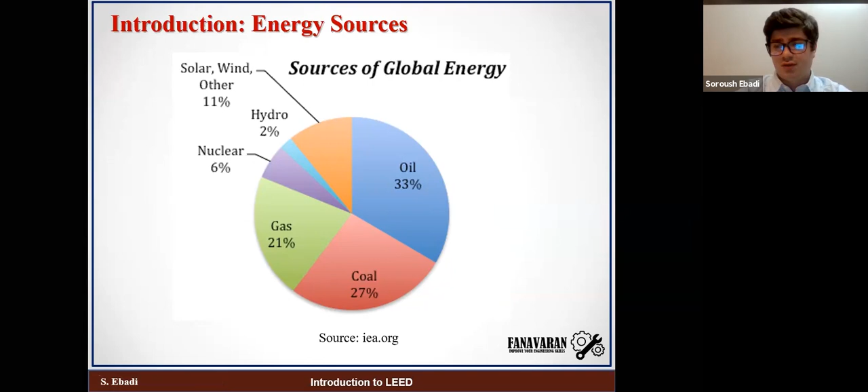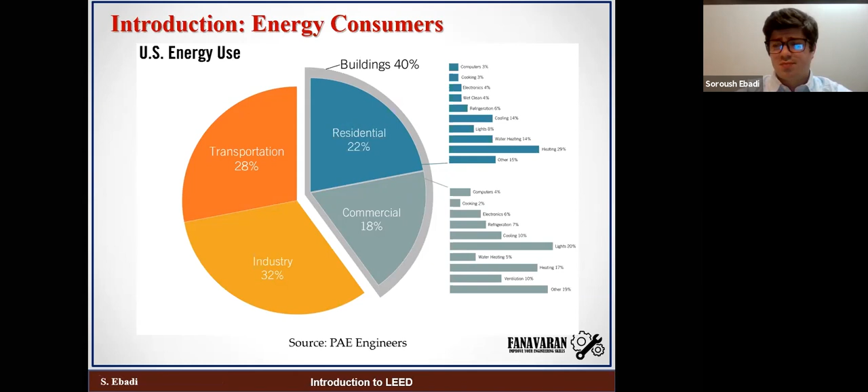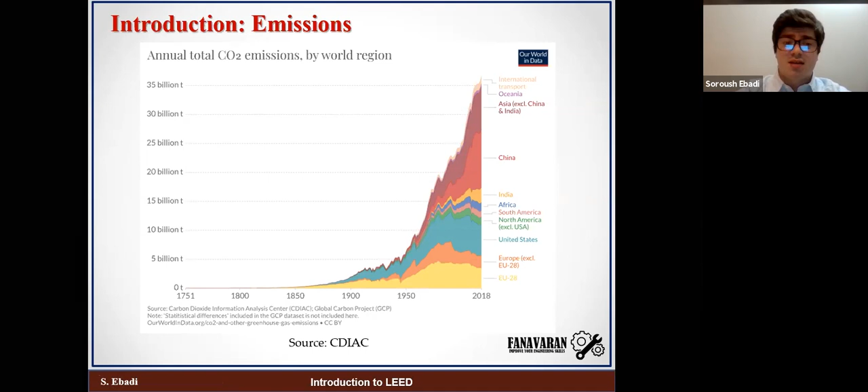Okay, let's have a look at the next slide. Now we talked about the increase in population, energy sources, fossil fuels, and emissions. What is the plan now? What do you think we should do? Maybe the first one - when I was young I was always thinking renewable energies is the only and best option, but now I'm not in favor of it that much. What do you think about this statement?

Can renewable energies be something reliable? The renewable energy is something that we get from nature, for example from the sun or from the wind. So if some day we don't have a sunny day or windy day, maybe we lose the energy that we need that day. That was a great answer. Who else wants to jump in? So renewable energy is not kind of reliable.

And what else? What is the main challenge that utility companies are dealing with these days? Peaking hours, or peak hours. What will happen during the peak hours? Anyone knows?

What will happen when we hit the peak hours? More demand. And what will happen? Imagine in Toronto, sometimes in summer we are having a heat wave. Outside it feels like 40 degrees. Everyone needs to stay at home. The cooling load is at its maximum. So what will happen at this point? We have a heat island.

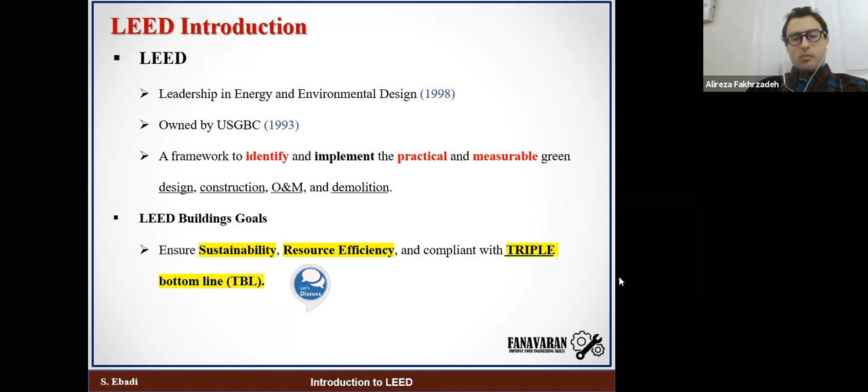Does anyone know the term commissioning? With commissioning, you want to make sure that your building, after a few months or years, is still working as efficiently as it was designed for. So from time to time, you send a commissioner to check the mechanical systems incorporated in the building and try to get it back to the design factors, the basis of design. The same as your car, your building needs some maintenance and adjustment which you have to do every while. For example, you have to balance the flow, whether it's airflow or the heat transfer fluid flow, in order to ensure your equipment is running at its efficient point. So we have commissioning here.

Now let's talk about the last phase of building: demolition. What does it mean? When your building has aged enough, at the end of its life cycle, what are you going to do with the building? Are you able to recycle the materials, or is it just going to be out of use? Exactly. So I want to see what materials I can reuse for the new building. So in demolition, we have to consider this one as well.

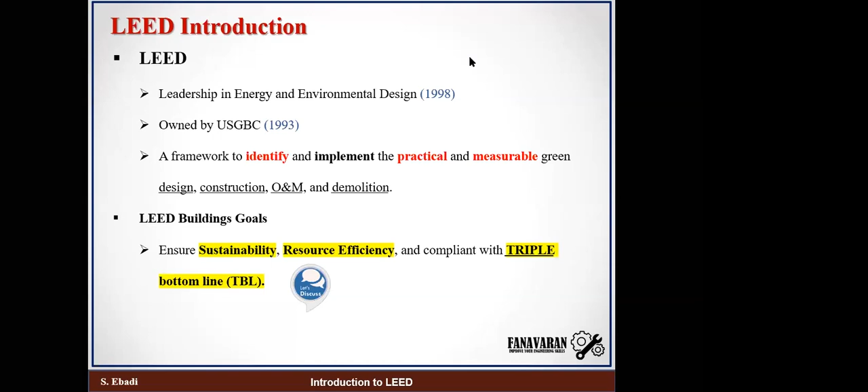What are the main LEED building goals? I want to be sustainable. What does sustainability mean? Sustainability has three pillars: one is economy, the other is society, and the other is the environment. So if you want to be sustainable, you should meet all of these together. Or let's make it easier: sustainability means that if I'm using resources now, use them in a way that you can keep something for the next generation. So don't use all of the resources. This is the term of sustainability.

And I want my building to be resource efficient. How can I have a building which is resource efficient? I can put a good building envelope in my building so I won't have heat losses, so as not to burn too much fossil fuel.

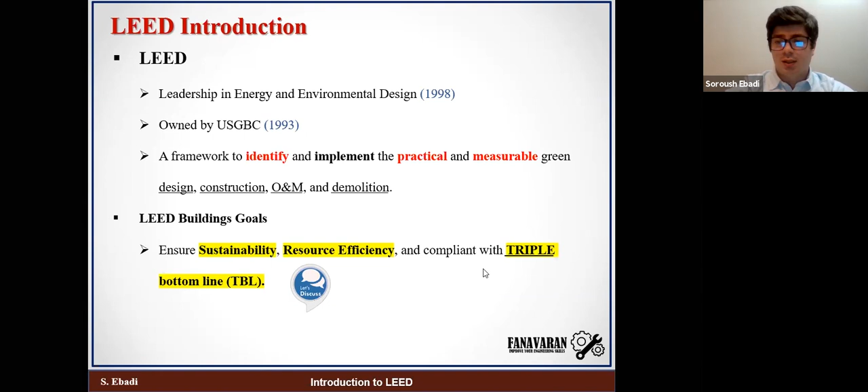And the most important thing for a LEED building is to meet something called the triple bottom line. What is triple bottom line? Triple bottom line is 3P: people, planet, and profit. Why am I talking about profit? Let's say you are a building developer, you are building a building. I come to you and say, hey, let's build a LEED building. Is that enough for you? Because developers usually just think about the money, right? So LEED buildings should be justifiable, meaning that if I'm spending money at the initial stages, at construction and design phase, I have to ensure that my building is paying back that money. This is the term that convinces the developer to go through with LEED buildings. I'm going to explain this more and we are going to have a discussion. So I said triple bottom line means people, planet, and profit, dollar.

For the people or social benefits, basically I want to provide them with a comfortable situation. For example, let's have better indoor environmental quality, better ventilation rate, better thermal situation, better acoustic comfort. And they are going to be healthier. How can they be healthier in a LEED building?

Let's say in your office, the ventilation is not proper. Somebody is smoking outside, all the smoke comes in, and you get a headache from it. But LEED buildings, we consider all of these items. I want a proper ventilation rate.

Now let's talk about planet or environmental benefits. What are the benefits in terms of environment? I want to protect wildlife. Don't build your building in a restricted area. I don't want my air and water to get polluted. I don't want to have extra waste. And I want to prevent natural resource depletion.

These two items I think are pretty straightforward, but now let's talk about profit. This is the term that LEED consultants or engineers have to work around to say, okay, if you are building a building and you want to go through LEED certification, you're going to pay maybe 5%, 10% extra, but you're going to have your money back in a couple of years. We'll talk about the return on investment for LEED buildings.

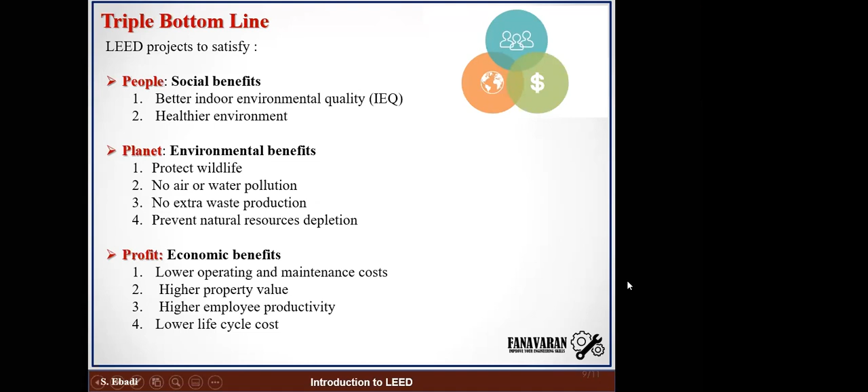Consider this case: you're working in a room without any window, and compare it to the case that you're at the penthouse level with a beautiful view of the lake, jungle, people walking around. What's the difference between these two cases? I think about the quality. Quality. By the nature of humans, you want to be connected to outside. Always remember this.

What are the features of LEED certified buildings? Look at the first two items: you're gonna save money and you're gonna have higher initial costs. Does it make sense how you're saving money but having higher initial cost? Yeah, because your operating cost would probably reduce. You're using less energy, so you will pay less, for example, for energy. So you will get your money back after a couple of years, but you will invest more money at the beginning.

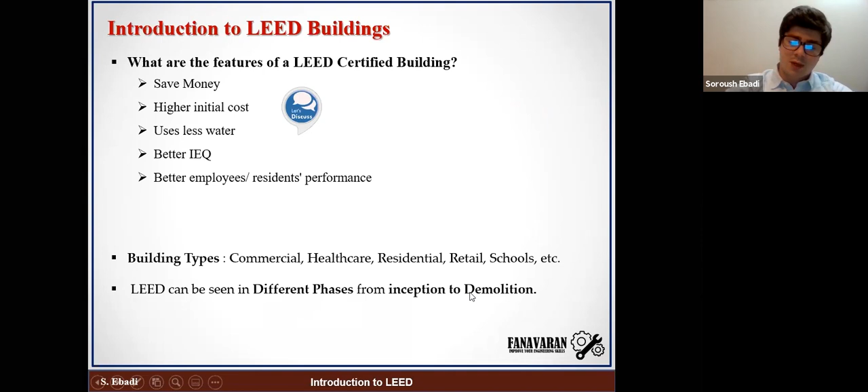Perfect, let's get to the most important slide here. I have different types of certification. The first one is BD+C, which means Building Design and Construction. The second one is Interior Design and Construction, which most architects will go with. Then I have O&M, Operation and Maintenance. Then ND, Neighborhood Development, and LEED for Homes.

Now let's have a look at this diagram. As an individual, you're gonna start with this step, which is LEED Green Associate. LEED Green Associate gives you general information. You're not gonna be perfect at it, but you know your terms and can understand most of the fundamentals. Once you got your LEED Green Associate, you can go through one of these.

You can be LEED AP, BD plus C, Building Design Plus, and Construction. You can be Neighborhood Development, Operation and Maintenance, Homes, and Interior Design and Construction.

Now you remember I asked you how much does it cost to be a LEED certified building? The answer depends on certification levels. I have different certification levels of the building, based on the points that I can get. The first one is certified, I have to get 40 to 49 points. Then silver, 50 to 59 points. Then gold, 60 to 79 points. And then platinum, 80 plus, which is 80 to 110 points.

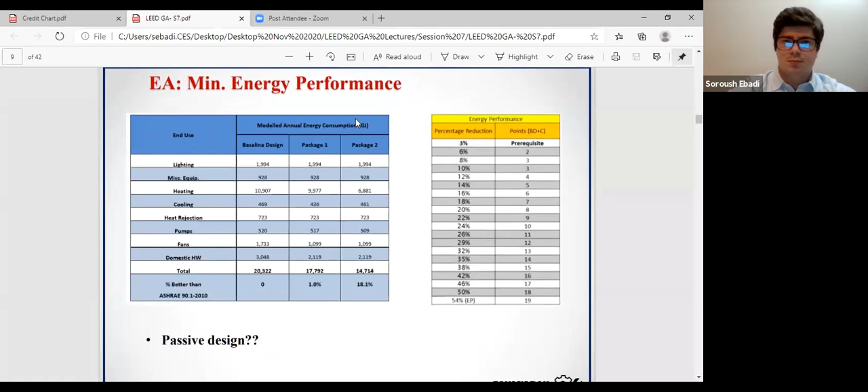Okay, let's have a look at this slide. Can everyone see this? Is this clear enough for you guys? Okay, perfect. Yes, that's good.

So here, we did an energy modeling for a building. Baseline design is my ASHRAE 90.1. Then I have two cases. For example, I am using efficient equipment, which is package 1. And for package 2, I'm using very high-end equipment, which is more costly, more expensive. Let's see the results. For package 1, I've got 1% better than ASHRAE 90.1. For package 2, I got 18.1%. This is just a model, right?

Now I go back to my table, which is for the LEED. See, if I get 1%, basically I'm not going to get any point from this energy credit. What if I consider package 2, which is 18%? Okay, so for 18%, I'm getting 7 points. How about I try to improve it a little bit more, make it 20%, and get 8 points?

Now, this is the time that all of the trades need to see it, meaning the engineers, LEED consultant, the project owner, and see, okay, I can get 1 more point here, and your cost is going to be 10,000 extra. Now it's their decision to see that 10,000 extra, what is the return of investment for that? What are the advantages? Then the team can decide how many points you want from that point.

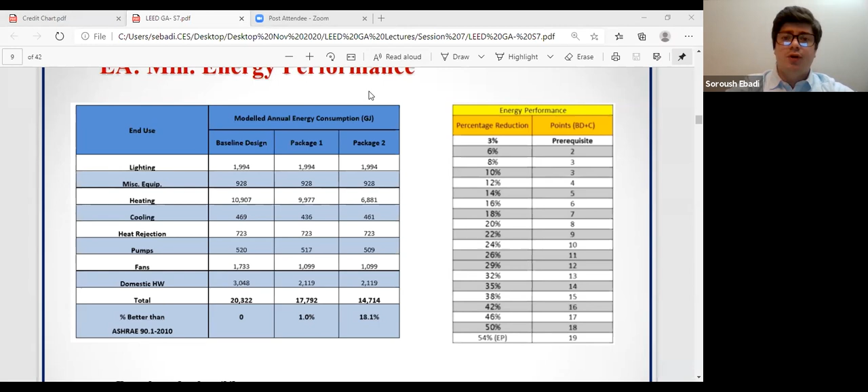But when you apply for LEED certification, at the first point, you will be at pre-approval phase. Means that my target is to get LEED Silver. I am targeting to get 52 points. How about after construction, for some incidents, you couldn't reach 50? Still, there is no problem. You can revise it to certified. So at your design phase, you tentatively consider LEED Silver, but you never know what is going to happen. Maybe at the end, you see that it's better than LEED Silver. By spending a little bit extra, you can get a better certification level.

What is the... Soroush, may I say something? Sure. I don't want to interrupt, and it's a very good discussion, but because we have only 10 minutes, do you want to wrap it up, and ask the audience for some questions? I need 15 more minutes, if it's fine with you guys. Yeah, we're going to stay a little bit more. But yeah, okay, I want people to enjoy today's presentation.

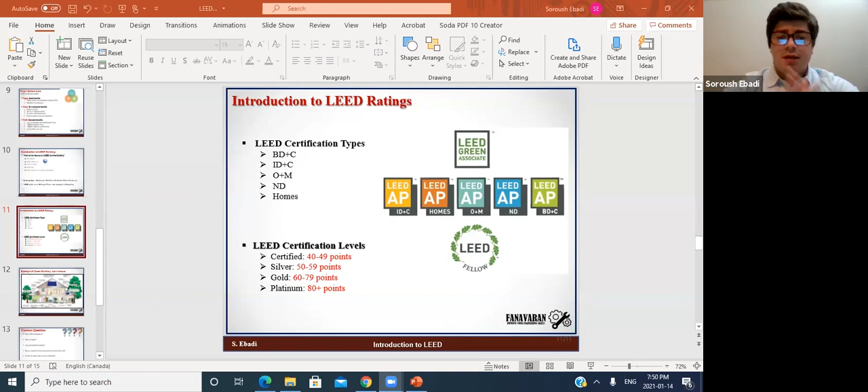Now, I talked about these points. I want to show you something very cool, and that one is nothing but LEED credit charts. Let's have a look at these credit charts. What are the items that LEED is talking about? The first one is location and transportation.

For example, it's talking about sensitive land protection. I don't want to build my property or my building on sensitive land. Let's build my building at a high priority site, meaning let's target a building in downtown Toronto, which has many diverse uses. So I can get either 1 point or 2 points. I collect the points here.

The next one is sustainable sites. What does it mean? It means that during construction, I want to make my building, but still I want to have a sustainable environment.

I don't want too many pollutants to go into the air and water. And I want to have open spaces. In front of the building, let's have a kind of garden that people can see and enjoy their time.

Then I have water efficiency. It could be outdoor water reduction or indoor water reduction. For example, for my landscapes, which is outdoor, let's use native plants that you don't need to water a lot. And for indoor, have you seen these dual flush tanks? Many buildings are using it now. That's one of the things you can fit in here.

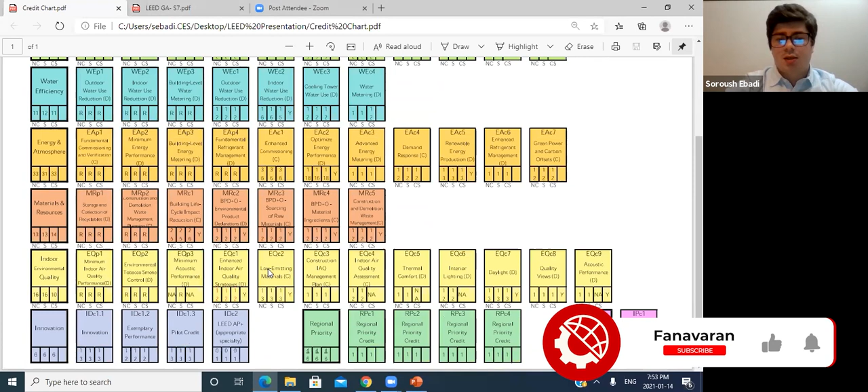Then I have my material and resources, where I get my material from - is it from a sustainable site or not? Then I have indoor environmental quality, which could be indoor air quality, minimum acoustics, low emitting materials, and mainly thermal comfort, interior lighting, and daylight. We'll discuss this in detail during the courses.

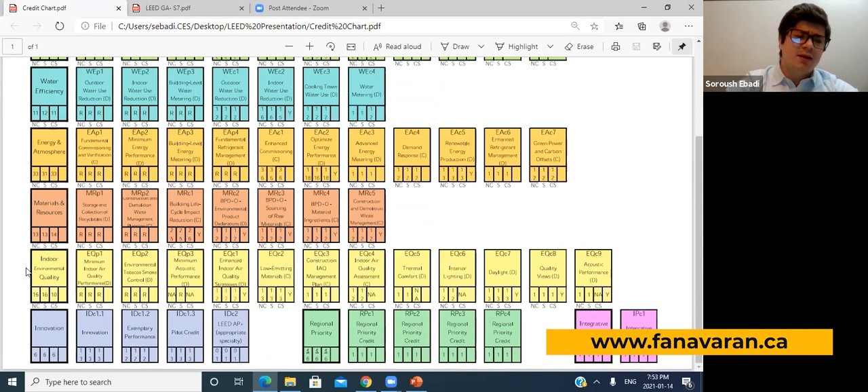And the interesting thing here is we have something called innovation. I want the LEED framework, the LEED fundamentals, LEED standards to be developed. I don't want to say something and everyone just follows that. I want people to be innovative - let's innovate something, let's find solutions to have more efficient buildings. So you can see, you can get even more points here, up to 6 points.

Any questions regarding this table?

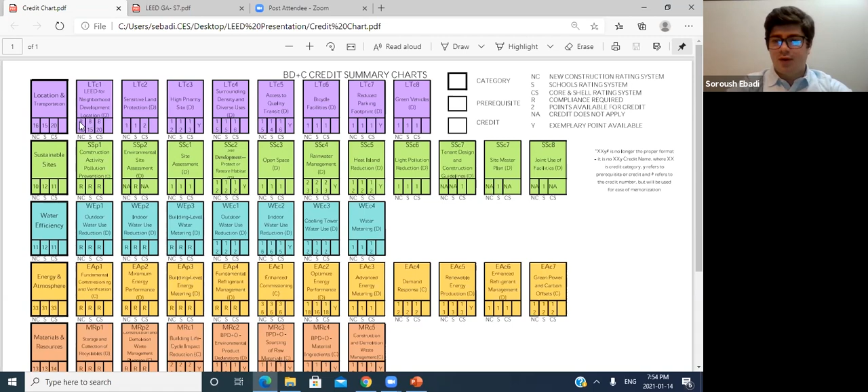So based on these items, you calculate your points and then see - if it's between 40 to 49, you get certified. If more than that, you get silver, and it goes up and up.

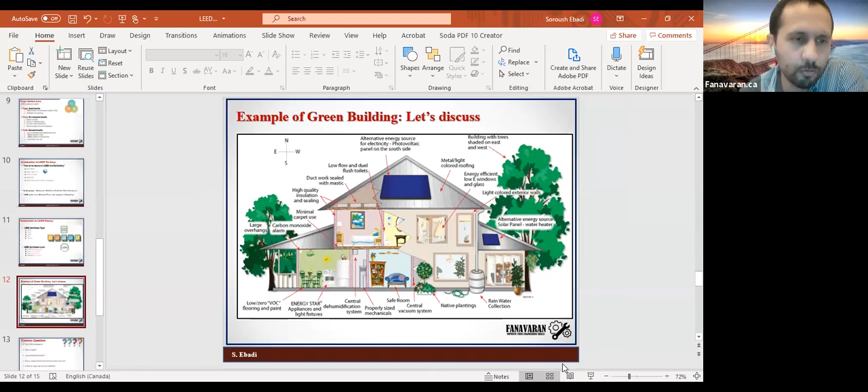All right, if there is no question, because of the time, I have to go back to the slides. Jump in if you have any question. If not, Soroush can go to the next slide. So there was no question, I assume, in that chart. Yeah, just wanted you to be familiar with it.

Okay, let's have a look at this slide for 1 minute and tell me what are the features of this building that could possibly get LEED certification. 1 minute, let's see.

Everything written there is good, so they're probably going to get some points. Okay, for example, which one? Can you talk about native plantings?

What does it mean? So native planting probably means that you choose plants that need less maintenance and water consumption, so that reduces the overall consumption of water, and that gives you some points. Exactly. It goes to the water efficiency credit, right?

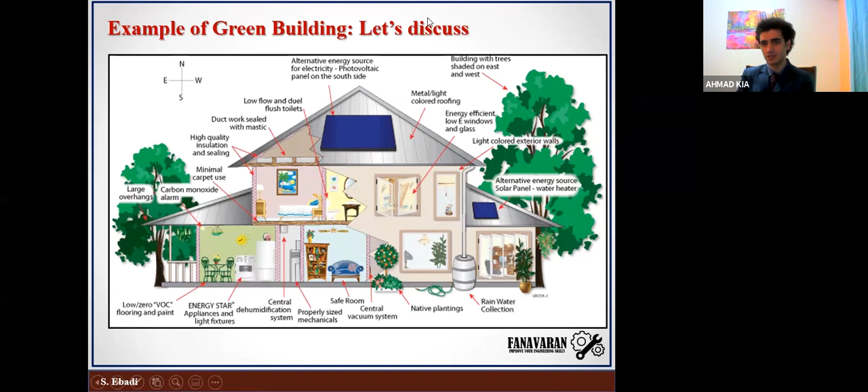What else can you see here? In this building, we are using the wastewater from rain, I think, to water the flowers or the plants. Exactly, so it helps with the water efficiency credit. Perfect. What else? Our architects...

So see, this one is east, this one is west, and I have 2 trees over here. Why east and west? Using the shade of the trees for the cooling system, I mean? Exactly, exactly. But why east and west?

Also, the south light is always the strongest, and we need the energy of light to come inside. That's good, but why am I trying to put some shade on the east side and the west side?

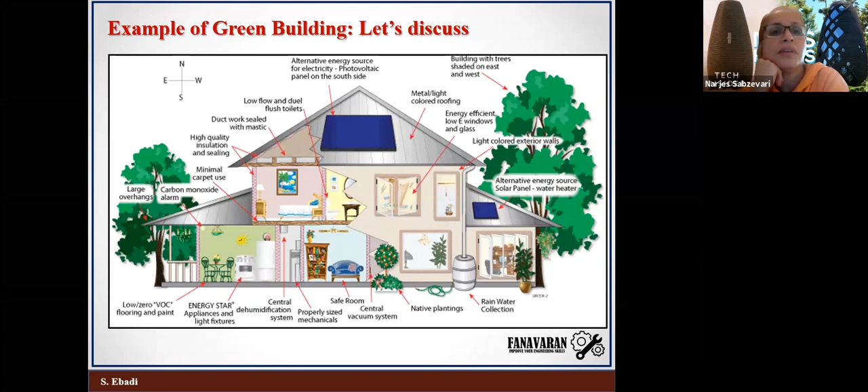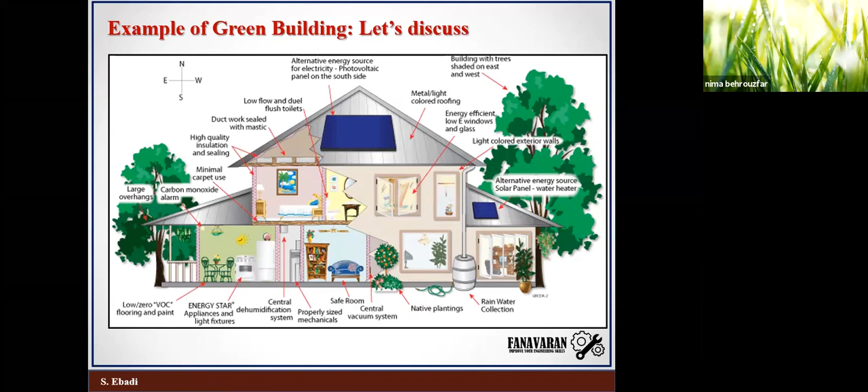Maybe for winter and summer - in winter, save some energy on heating with the sun, and in summer, use the shadow, I think so. What's wrong with the east and west side of the building? What is the angle of the sun during that? The sun arcs from east to west, and directly in that direction because of the radiation has some effects on the heating load.

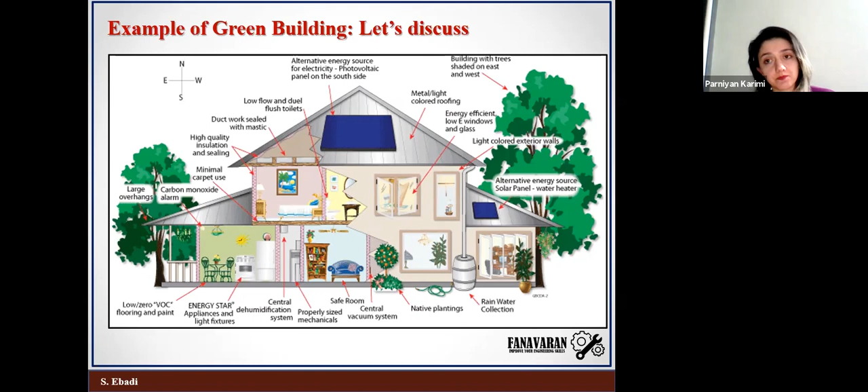Right, usually I don't like the sun when it rises from east or west - I like the sun to come through south and north. This is the reason. What else do I have here? Yeah, go ahead. Because the angle is lowest, so it creates glare. Exactly, yeah, very good point.

We have Energy Star appliances. Very nice, what does it mean? For energy efficiency, they use less energy. Perfect. So Energy Star is kind of a label you put on your appliances - you can see it in your kitchen. It means that equipment is good.

And we have a solar panel on the roof, which means that I would like to have some renewable energy. Yeah, very nice. Who knows about this one - low or zero VOC? VOC means volatile organic compounds.

Indoor air quality - what's the problem with VOC materials? They are volatile, so they get into the air and can be harmful for health. For example, some carpets we have in our houses, over time, emit gases. It makes you get headaches and decreases the indoor air quality. Is there anything else I'm missing here?

Let's have a look at the roof. Yeah, metal, light colored roofing. What is this for? It prevents heat island. What is heat island?

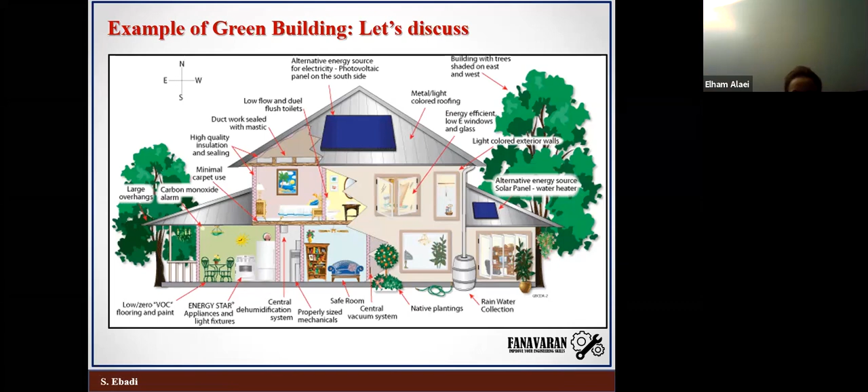Some materials absorb the heat and cause the surface to be hotter than other surfaces. It absorbs heat during the day and rejects that heat during the night. That's why in downtown Toronto, because of so many heat islands, so many heat hard surfaces, the temperature during the night compared to an area like Aurora is going to be 2 to 3 degrees higher. This is the effect of heat island. We don't like this one.

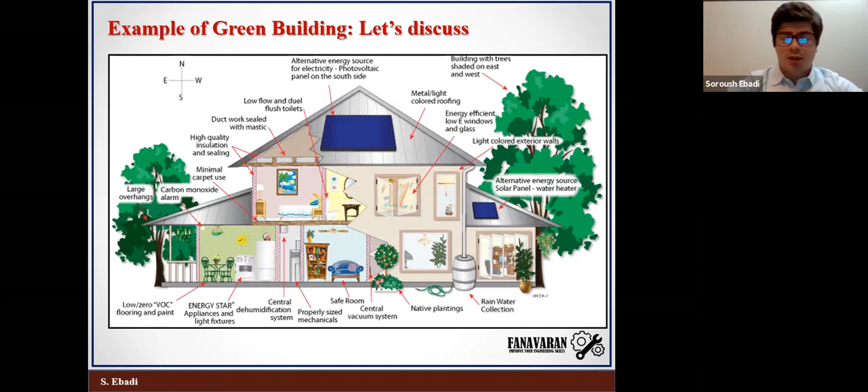Alright, very good. I guess because of the time I have to move on, but that was great. Now let's talk about the common questions.

Why do I need to get LEED designation? The first thing is the interest of any individual - they like to be knowledgeable in terms of energy, environment, and how to design a building. The second thing is everyone knows how competitive it is to get a job in these fields, and these days job requirements are asking for LEED certification. So I'd say this is motivation to go get your LEED designation - I guess it will help.

Who is eligible? Basically every individual is eligible. You just need to be interested and passionate, and you have to be more than 18 years old. Do you need any prerequisites? No, nothing - you don't need to be an engineer or an architect. It doesn't matter, everyone can get this certificate designation.

How can you register for your exam? You have to go to usgbc.org, create an account, and then register for the exam. How much does it cost? It's $250 US dollars, but if you're a student, take this opportunity because there's a $150 discount, if I'm not mistaken.

Is there any expiry date on your certificate or designation? Yes, there is, but that doesn't mean you have to go and rewrite the exam. As an individual, once you get your LEED designation, you need to fulfill some required hours called CE, or continuing education. You could either work on some LEED projects or attend some workshops. They want you to be updated and your knowledge to be improved every day.